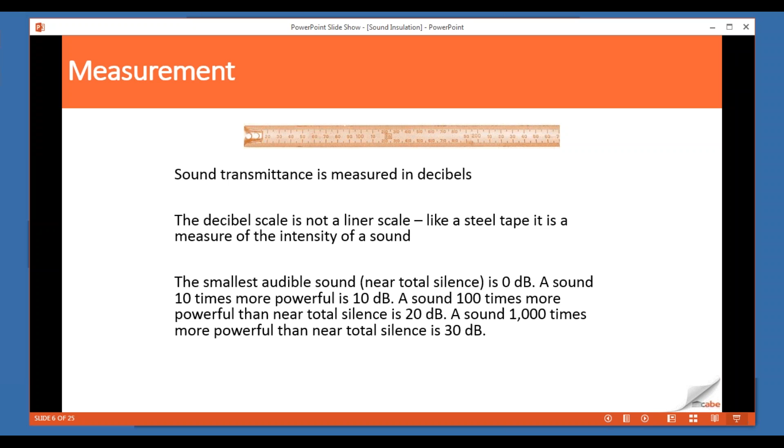Okay, if we get to 10 decibels, that is actually 10 times more powerful, 10 times more intense than that 0 decibel sound, although that would still be very quiet. So 100 times more powerful is 20 decibels. So we're not simply going up in a linear scale. So when we get to 30 decibels, we are 1,000 times more powerful than that very near silence. And it's worth appreciating then that when we get to looking at sound levels, an increase of just a couple of decibels is going to have a significant effect on the actual sound level that we're talking about.

So to give some examples of typical levels that we encounter in our everyday life, I said near silence is the benchmark, the 0. A whisper that's just heard by somebody immediately next to you would be about 15 decibels. And as we go up the scale, the rock concert, the jet engine is around about 120 decibels. And those one-off, firework type sounds may be slightly more than that.

And obviously, in addition to environmental comfort and ideal conditions, we do all have to also consider prolonged exposure to high sound levels, which can have a knock-on effect on the hearing in the long term. I'm sure many of us spent our youth with headphones on, listening to rock music, and as a result, our hearing perhaps nowadays isn't as good as it used to be. And long-term exposure can cause issues.

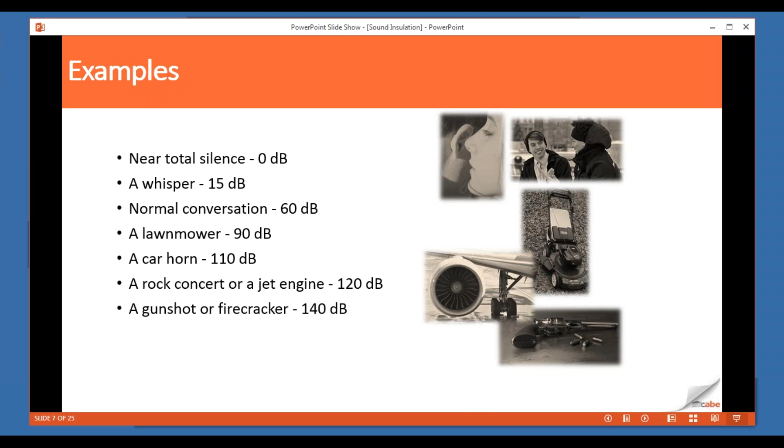But what we're trying to look at really is trying to reduce the sound intensity from its source to the point where somebody who's not part of that activity in another part of the premises or in an adjacent premises no longer finds that to be a nuisance. So reducing by 50 decibels is actually reducing the sound intensity by 100,000 times. And that would normally take a typical normal conversation down to the level of a whisper.

So in most buildings, we're looking for something similar to that. We don't want to be able to hear people talking in the property next door. If we can reduce it down to the point where it's a whisper, it's unlikely that it's going to cause us a particular problem. But some extremely loud noises will still be loud enough to cause us a nuisance.

And I'm not necessarily saying somebody next door is going to be repeatedly firing a gun, as is on this slide, but if somebody next door is repeatedly playing loud music, then in reality that will cause a nuisance because it will still transmit a reasonably high level of sound to the person on the other side of the party wall.

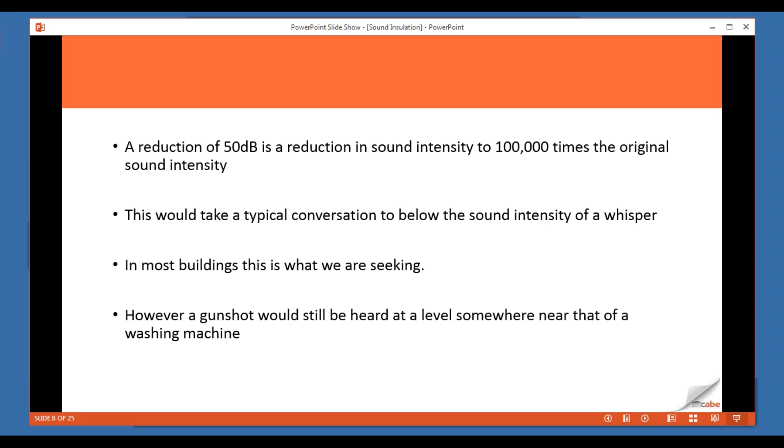And you probably saw a case recently go to court where a neighbour was driving their neighbour mad because they'd had a disagreement, by continually playing Ed Sheeran music at loud volume. And it wasn't necessarily the fact it was Ed Sheeran, it was the volume that was causing the problem for the neighbour.

So when we start looking at sound and how we're going to deal with it, we are looking at trying to break down the ways in which sound is transmitted. Now, primarily when I talk to you and you're talking to somebody in your working environment, sound is transmitted by the vibration of air particles. Obviously, in me talking to you today, it's a little more complicated because the air particle movement is then transmitted into electrical impulses, which are reconverted at your end through your speakers. But in reality, what we're looking at is transmission by vibration of air particles.

Now, in some aspects, those air particles may then interact with the structure of the building, cause the air within the structure to vibrate, and then transmit through that structure. In addition to that, we get the structure-borne sound, which is partially caused by the volume of me speaking at the wall and the wall picking up the vibrations, but partially also caused by actual physical contact with the structure, which then vibrates those molecules and causes the transmission through the wall.

So that, if you like, is the impact noise. That's the sound of the washing machine bouncing on the floor or banging against the wall or something of that sort. And again, that vibration, that movement causes the transmission of the sound through the solid structure. So we end up with impact and structure-borne sound as well as airborne.

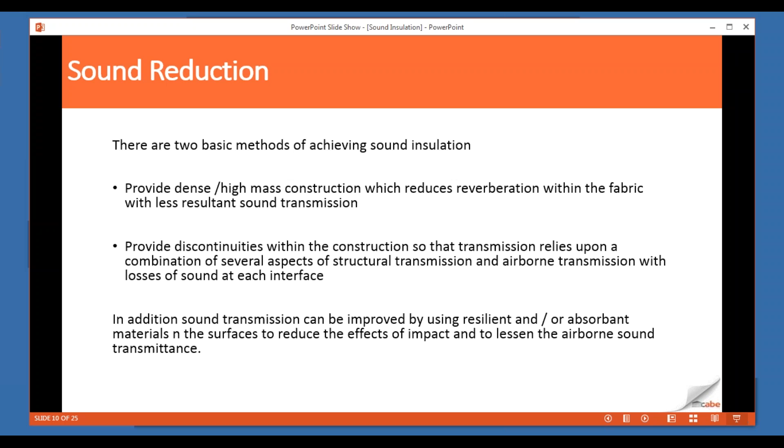So when it comes to what the building regulations are actually looking at, what we have to look at is what spaces we're actually dealing with. So we all expect nowadays that when we buy a semi-detached or a terraced house, we have a good standard of sound insulation between that house and the adjoining property. And there's an expectation with new build as well, particularly that if we're buying a new flat, we expect a similar level of performance. Now, certainly 40, 50 years ago, that wouldn't necessarily have been the case.

People would have understood that in buying a terraced property or a flat, you get a degree of noise from your neighbours. But current purchasers and society today is less tolerant of those sorts of aspects. And as a result, they expect a higher standard of performance. And obviously we need to separate as well noise that's coming from other uses in the building. So if we have a flat over the top of a shop or an office or commercial use, we need to provide a degree of sound insulation in that situation as well. So we have to look at how these things play out, how we're separating the spaces and what standard of performance we're looking for in those instances.

It's also worth mentioning at this point that obviously the building regulations themselves set some minimum standards in terms of sound insulation and performance, and it's unfortunately the case, I suppose, that with the regime we have, people aim to hit the minimum standard rather than perhaps designing for something that might be a little bit better than that or provide a greater degree of sound insulation. From a positive point of view, we do have a regime where it is perfectly possible to test the finished construction of a property before occupation to ensure that we actually get the correct level of sound insulation. And as a regime for achieving compliance and actually demonstrating that, that's a very positive move.

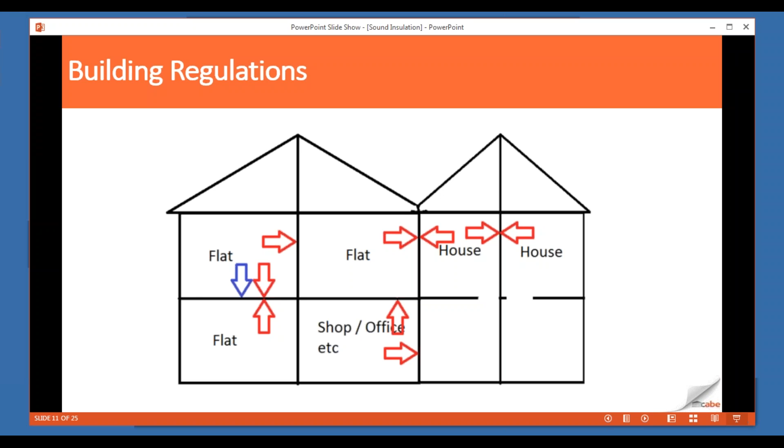So what are we actually looking for? Well, the standard we look for will vary depending on whether we're looking at a new build or a change of use. And again, perhaps early on in the design stage, those of us doing the design, doing the redevelopment, perhaps dealing with building control, need to be looking to educate the end user in understanding that the sort of performance they're going to get in a converted property as opposed to a brand new property is going to be different. It's never going to be possible to achieve the same standard of construction in an existing building where we are changing the use as we might get in a brand new building where we can deal with everything from scratch and get all of the construction, all of the specification, all of the detailing absolutely right.

So really what we're looking at is the sound of somebody walking in the flat above or the room above us. So we have some standards we're trying to achieve. This is what we can then test to and see whether we've managed to achieve that or not.

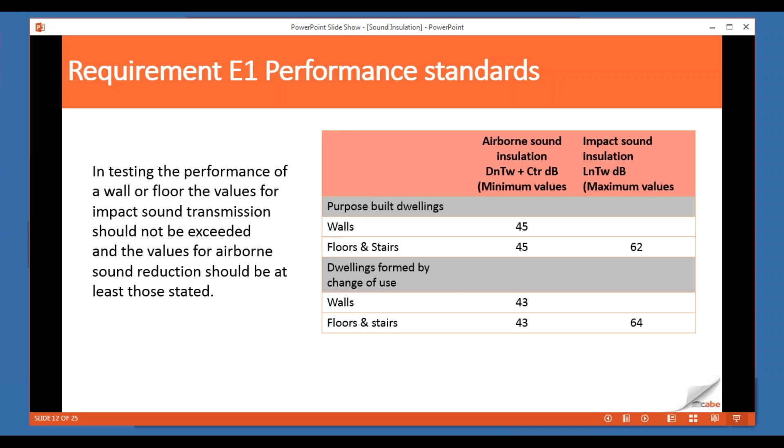Just before I start looking at some of the constructions we might use, I'm just going to pick up a couple of early questions that have come in. The first one: in change of use office to flats, it's often difficult to obtain a test. Any suggestions? Well, realistically, the regime in terms of building regulations has two options in terms of demonstrating compliance for sound insulation. Either we look at a sound test result in situ on completion, or we construct using an accredited robust detail, which isn't necessarily going to be always appropriate for a change of use type situation. So we do have to look at a testing regime.

There will be practical issues in terms of testing, so whether we can actually get it to work, whether we can physically put it in, but as far as possible, that's the best way to demonstrate compliance. Graham's asked the question, are insulation levels in hotel environments the same as domestic? Well, no, the values I've just put on the screen there are in relation to dwellings. What you would expect in hotels is a slightly different scenario, but not totally different. Hotels, because they're a short-term occupancy, will have a different sort of status. They're not necessarily dwellings as such, although they are residential accommodation. So we are looking at a standard, but the standard may well vary slightly.

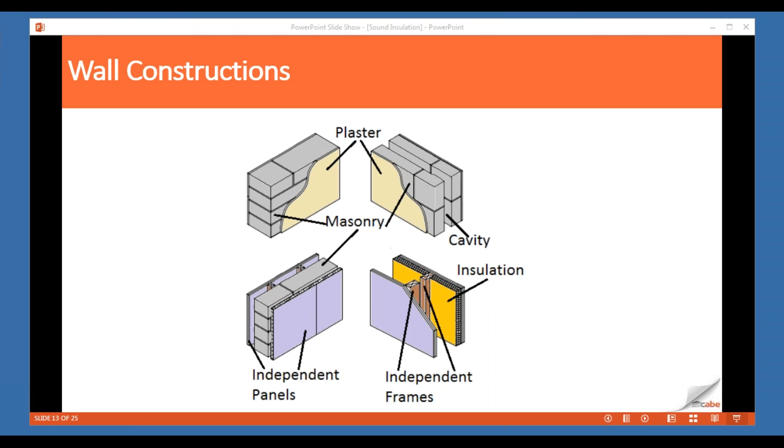So what do we have to pay attention to when we're looking at wall construction? Well, we have to make sure that we're using the right weight and density of construction. The Approved Document E to the building regulations gives some examples of how to achieve compliance, but clearly when we're looking at a massive construction to absorb and resist sound transmission, we have to make sure we've got the right specification of blockwork, etc. As I've said, we have to ensure that all of our joints are correctly filled, so it has to be a much more attention to detail.

Seal the surface of the masonry to prevent the sound getting into the air spaces, and then simple things like the detailing, making sure that if we have to chase in services and sockets, that we do so in a way that doesn't compromise the overall effectiveness of the blockwork, and certainly so that on adjacent sides of the party wall we haven't got sockets and chases back to back, so that we've got the potential that issues are following through.

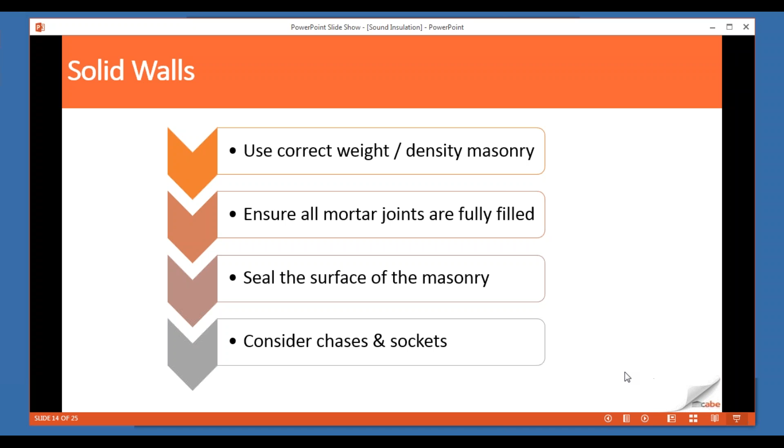The other thing that's important, if we're using a cavity wall construction, we need to make sure that we've got the right width of wall and that we haven't got any mortar snots or anything that have gone down the cavity. We've got the right standard of wall ties, and quite often a less rigid polypropylene type tie might perform better in terms of sound than something that's a bit more solid. And again, looking at how we ensure that we've got the mortar joints filled, but also make sure that we don't have any major structural elements of the building that actually bypass the cavity and link one side to the other.

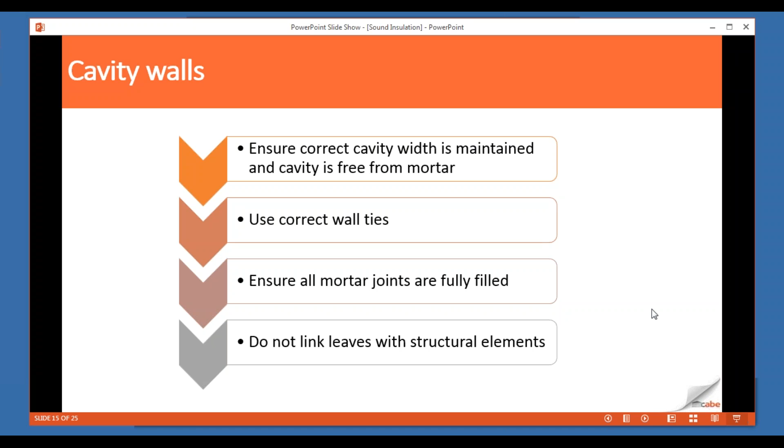And then if we're looking at a framed wall solution, it's making sure we've got the right insulation, that it's in the right place, that the boarding lining has staggered joints so we don't end up with a pathway through, that we've got a decent discontinuity in a gap, and particularly where we're looking at a panelled finish, that we seal effectively around the sockets and the services so that we make sure that we maintain that integrity.

The other thing I would say with that is, although the London Plan is suggesting 2.5, there are moves afoot at the moment to make the national space standard, which was introduced about 18 months ago, apply throughout, whether it's London or not. And the national space standard only requires 2.3 metre headroom, and certainly the last time I was talking to somebody, there was a suggestion that the standard eventually may find its way back into building regulations where it used to be up until the mid-1980s, when we used to control headrooms to the property. But it is something to consider. The taller the panel, the more potential vibration you end up with, and the potential sound transmission you're going to get.

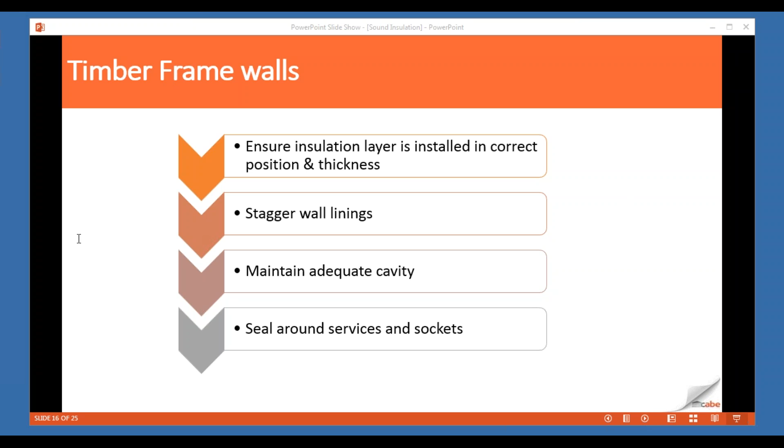So, moving on. So moving away from walls and looking now at floor construction. Again, what we're trying to do with floor construction is consider some of the issues around sound transmission. But obviously one of the aspects we have to take into consideration is the impact, the effect of somebody walking across the surface, electrical equipment that may be sat on the surface like washing machines, tumble dryers and the like, and also those big hefty speakers serving the sound system that might be sat upon the floor.

So in addition to having a dense construction to absorb some of that, what we actually try to build into most of our floor constructions are some resilience or soft covering or absorbent layers to take the initial impact transmission away, and then as far as possible to build in density and/or discontinuity to stop the sound transmission actually moving through. So there's three examples of how to put together a floor construction there.

So a fairly dense concrete base with a soft covering, with the ceiling below, with particular attention there to the fixing and the joining of the ceiling to the concrete base to prevent that direct sound transmission. A floating floor type layer, again with a concrete deck, but a resilient layer in there to take away that impact and reduce that effect.

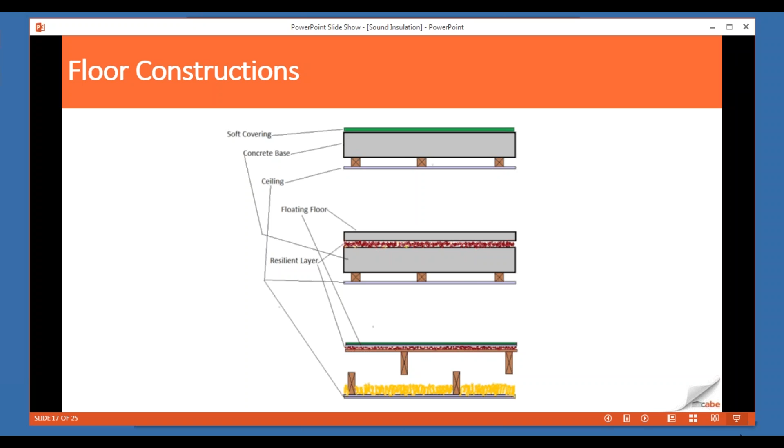Again, what we have to make sure of there is there's no point in fixing a resilient layer on the upper surface of the floor or under the floor boarding if we're then going to fix all the way through. So where we have a floating floor on a resilient layer, we can't then screw that floor through to the substructure to stop it moving around, because that will compromise the resilience.

When we're looking at this, as with anything, it's important to have the right material with the right characteristics performing as per the specification. And a lot of manufacturers will have tested their products and have test certificates to show a construction that should achieve the adequate sound insulation we're looking for. When it comes to the ceiling down below, again, stagger the joints so that we don't get those direct air paths through.

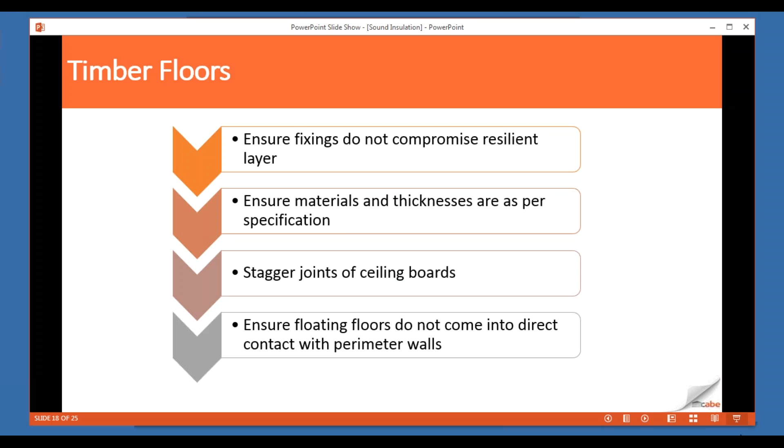And a lot of sound insulation and the success in getting sound insulation right is actually in the detailing. So when it comes to the joints and the details, things like floating floors, it's no good if they are then in direct contact with the wall or trapped by the skirting board, because that stops that floating effect, and therefore we end up with direct sound transmission through that point. So a lot of our work with sound insulation and getting it right is the attention to the detailing and the jointing rather than the overall construction that covers the majority of the floor or the wall.

I mentioned at the beginning that we're not only talking about sound separation between dwellings, but also within the dwelling. Now, this, I suppose, although Part E hasn't changed the sound insulation for quite some while, is the more modern part of the requirement, and certainly something that originally, where sound insulation was considered, wasn't really one of the major concerns. And this is about sound insulation within a dwelling.

And there is still a school of thought that, to be honest, sound insulation within a dwelling is the responsibility of the management, or in most residential situations, the parents. And if the kids are too noisy in the bedroom, then it should be addressed in other ways than trying to deal with social issues by designing in features within the building.

The other problem with dealing with sound insulation within the dwelling is if you're trying to separate noise from one room to another, but you have to put a door in the wall in that room, then it doesn't really matter what you do to achieve the sound insulation to the wall, you're not going to achieve a decent standard of protection because of the fact you've got a doorway there. So actually, when it comes to achieving standards and particularly testing regimes, you wouldn't test that situation with the door in it because it's not going to achieve the sound insulation through the actual door opening itself.

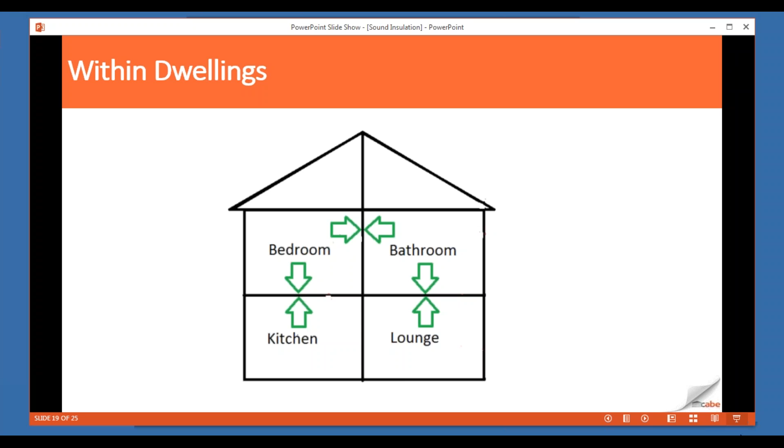So within the dwelling, we're looking to make sure that the bedroom is protected from noise from things like kitchens below, from bathrooms adjacent to it, and that we don't get sound transmission between things like bathrooms and lounge spaces as well. So there is a standard of requirement in terms of what we're looking at, in terms of walls and floors for airborne sound reduction.

As I said, it doesn't apply when we've got a door in that wall, and it doesn't apply to the wall that separates the ensuite from the associated bedroom that goes with it. And if you're in an existing building and it's a change of use, then again, you won't look at addressing that as far as the building regulations are concerned within the dwelling itself. So it's a lesser standard.

And if you bear in mind the standards we were looking at in terms of reduction before were around the lines for walls and floors of 45 decibels for new build, separating buildings. 40, because of this logarithmic effect, is a much reduced standard of sound separation that we're looking for.

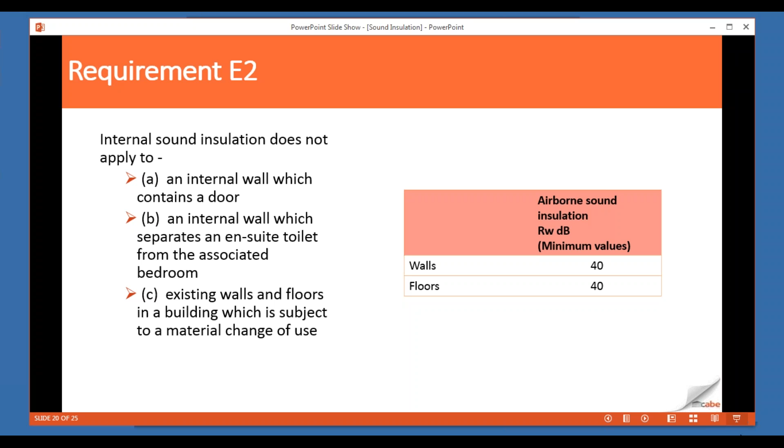What we do have to consider, and what a lot of attention is paid to when we're looking at sound insulation, is the issue of flanking sound transmission. And this is basically where we design a perfectly adequate element of structure to resist the sound, but we have numerous pathways for the sound to bypass that protection.

And so we have to make sure that our junctions of our walls with our external walls, our cavities, sealing the cavities, all of that prevents the sound bypassing the main construction and causing this flanking sound transmission effect. Now again, some of that can be achieved with dense construction. Some of it is actually achieved with discontinuity in the construction.

So again, one of the ways traditionally to have dealt with flanking sound transmission around the party wall is actually to have windows and openings reasonably close to the party wall to provide that discontinuity path for the sound as it goes through. But clearly this is where we have to pay a lot of attention. We can get the specification of the wall right, we can get the specification of the floor right, but we have to look at this ability of sound to go round, because if there is a pathway for the sound to be transmitted, then it will get transmitted in that way.

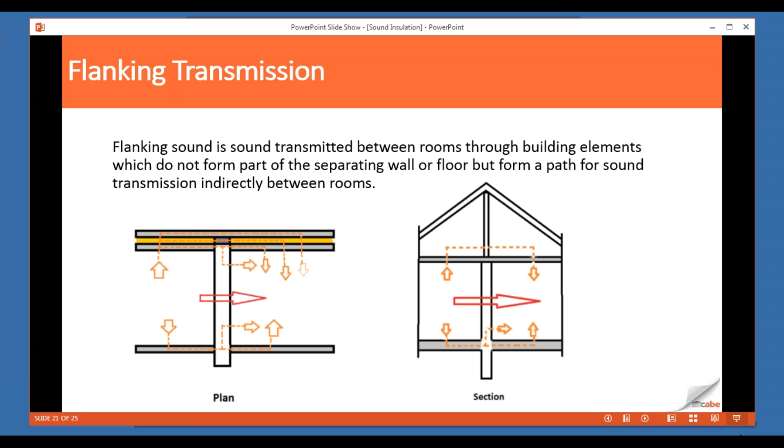Okay, right. So a lot of what we look at nowadays does fall down to completion testing in terms of sound insulation. Where we are told that failures are occurring at the moment relate to poor choice in design in the first instance, but that tends to be the lesser of the reasons for a failure. Workmanship is quite often blamed in terms of how these components are put together, and some of that is due to a lack of understanding of the person actually constructing the detail as to what it's trying to achieve.

We do still have an awful lot of problems in the construction sector with the specified materials, which perhaps achieve the density or the resilience we were looking for, being substituted for something similar but not quite the same, not quite tested in the same way, that in effect isn't going to give us the same solution.

And then, as I said, the biggest problem with completion testing is really showing up that it's the jointing details. It's that attention to detail to make sure it complies. And that is really an education process in terms of the person putting the detail together and the level of site supervision that's there to achieve that. But if we do use completion testing to check the performance, then we at least have the opportunity to go back and put things right if we haven't got it necessarily correct.